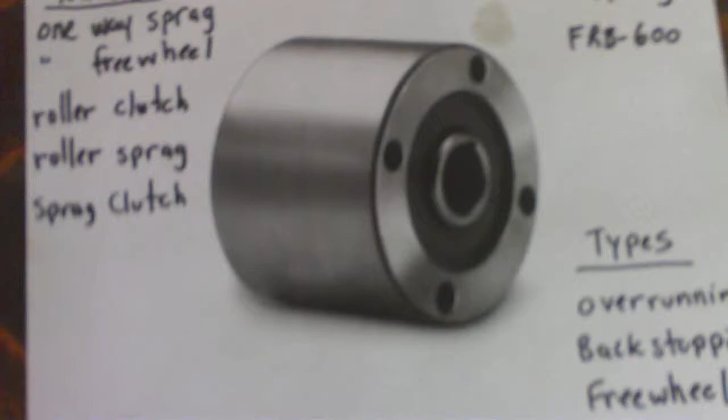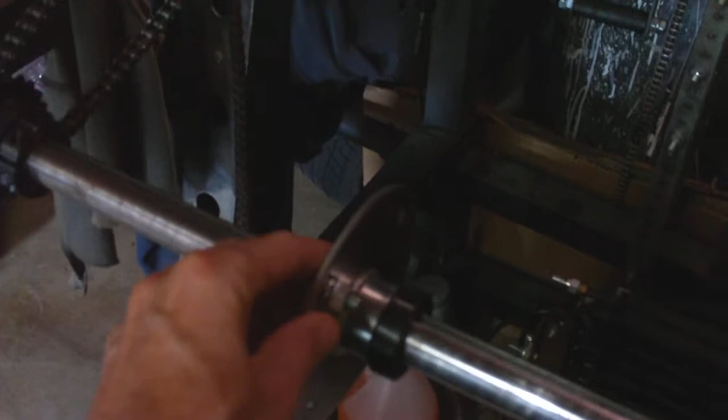So in the last video I did, I talked about the sprag clutch and investigating that as a possible solution for disengaging the winding wheel from the transfer shaft.

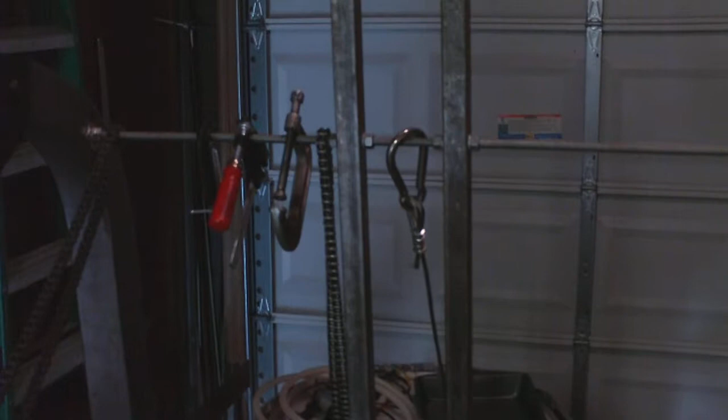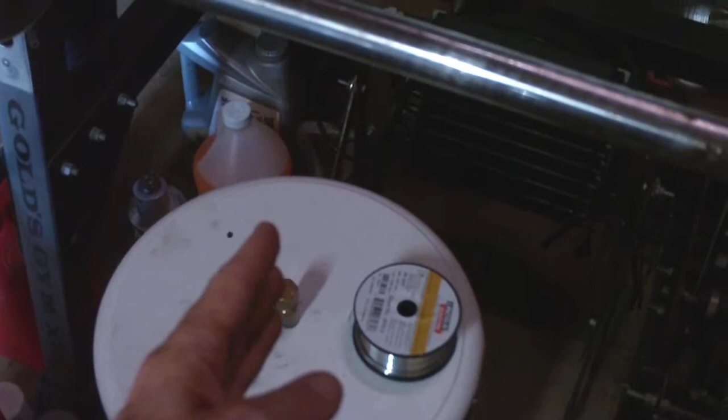Just to go over something real quick from the last video: after the weight falls on this gravity driven generator, the shaft is no longer rotating and transferring the motion to the gearbox and to the PMA back there to generate electricity. After the whole process is stopped and the weight has fallen, the weight has to be wound back up, which I mentioned already is going to be done manually through a boat winch, which is right there.

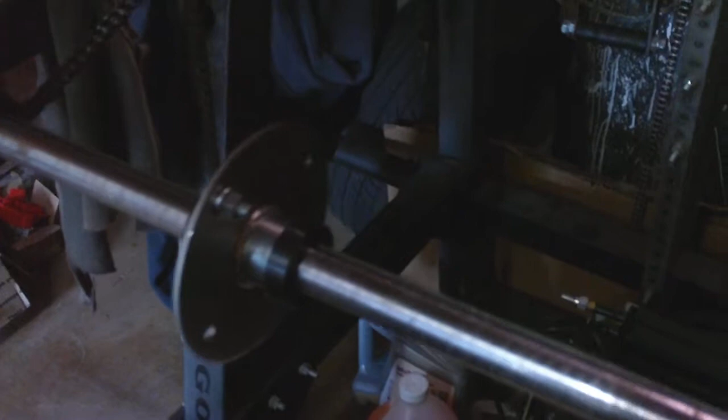Now, the problem is when you wind the weight back up, when a chain is attached to the sprocket -- which isn't mounted on here right now, but when a sprocket's mounted on here -- we would be competing with the force of the gearbox, a high ratio gearbox. That's not going to work. It's going to be very difficult to bring the weight back up. So there has to be a way to disengage the transfer shaft when we're winding the weight back up.

So that gets us back to where I was last time in the video, where we talked about using one of these, called a sprag clutch, specifically a backstopping sprag clutch, so that we could facilitate disengaging the weight from the winding of the weight back up from the transfer shaft.

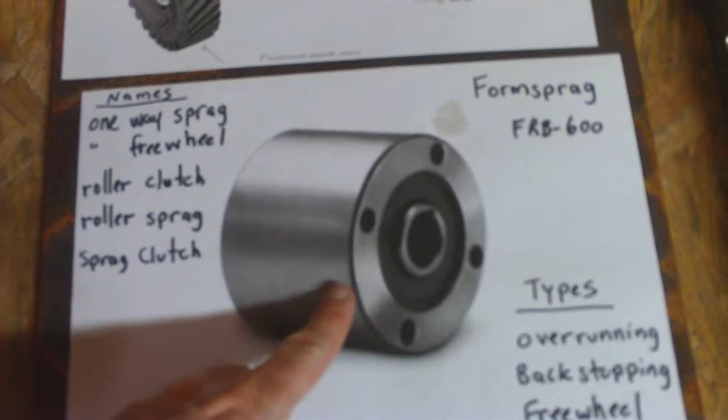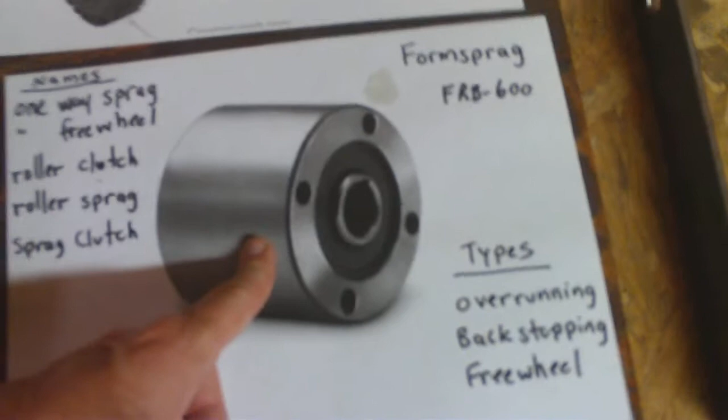So I looked into these and been poking around on eBay and some other sites, and for the amount of torque that I need for this application, these are very expensive, even the ones sitting in old stock. I'll keep looking around, but they're very expensive. These things run well over $1,000, some of them even more than that. I've seen some of these run up into over $10,000. For the one I need, at least brand new, it's well over $1,000. I just can't justify spending that kind of money.

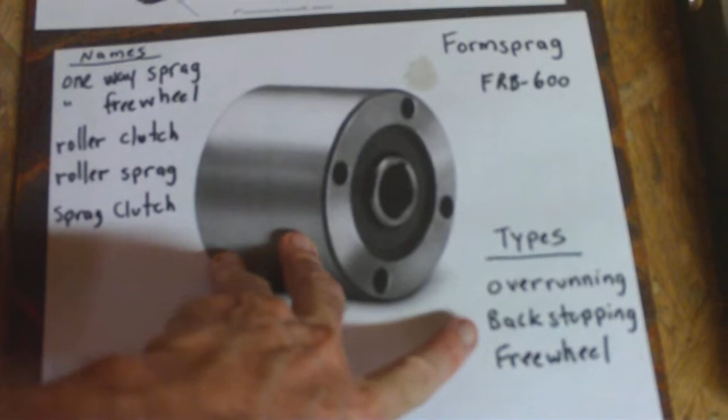I'll keep looking into some sprag clutches, backstopping clutches, to see. It's actually a freewheel backstop combination kind of clutch, but I'll keep looking to see if I find something.

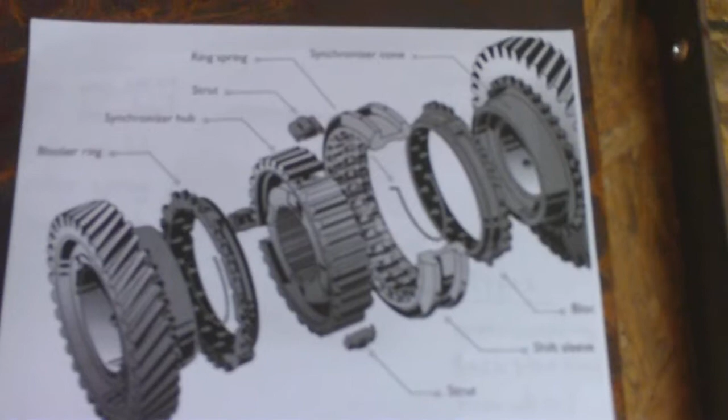But anyway, I've been throwing around some other idea, and some of you are going to recognize this, especially you automotive guys. This is a typical assembly for a manual transmission. Now, this particular picture only shows the meshing of two gears. The one on the far right is a gear, and the one on the far left is a gear. Everything in between is part of a synchronizing process, or synchronizing components, that help mesh these two gears together.

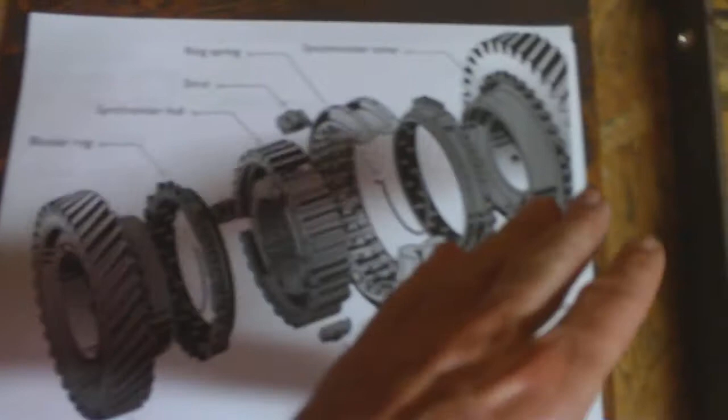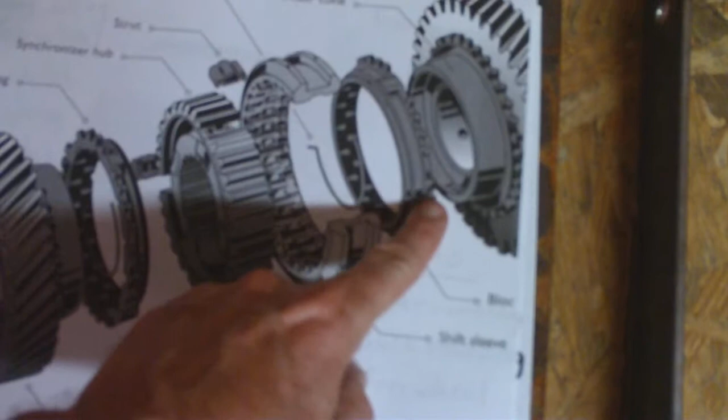So I've been looking into the idea of tinkering around with this. Just to quickly go through some of the components: this is a gear -- let me get my glasses on, can't see what I'm doing here. This is what's called a blocker ring. This is what's known as a synchronizing hub, or synchronizer hub. This piece in the middle is known as a shift sleeve, or sleeve -- I just call it a sleeve. And then to the right we're just repeating the process: this is once again a blocker ring, and this right here is known as a synchronizing cone, and then another gear. So way back over here, this little component is also a synchronizing cone.

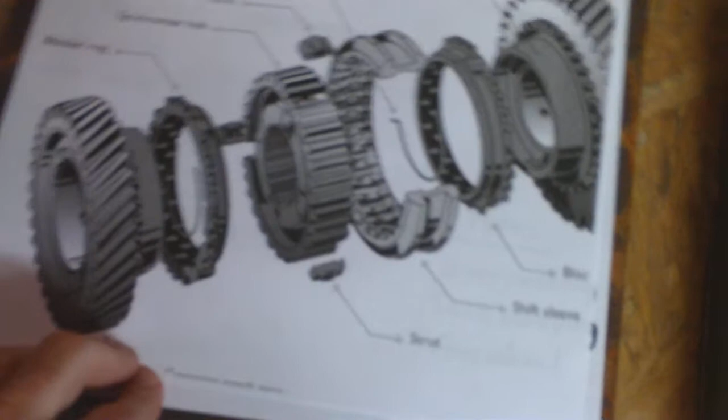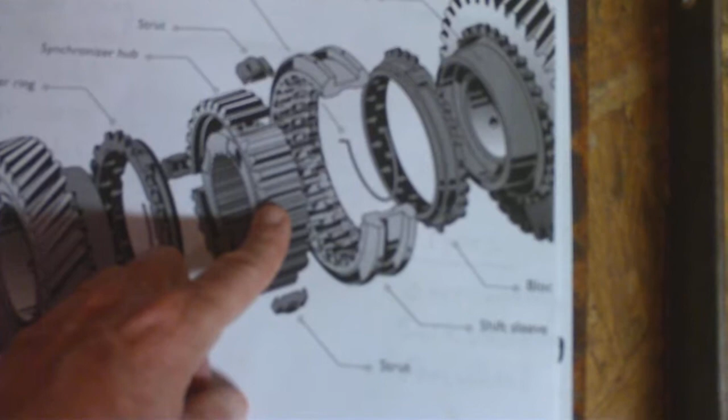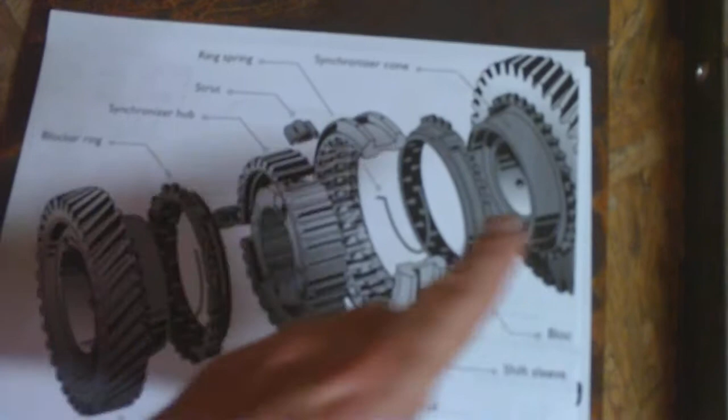Now, I've taken a close look at this assembly, watched some YouTube videos, watched how it's actuated, and I'm pretty certain that for this application all I'm going to need is the sleeve. What I'm going to do is take a synchronizing hub, or at least something similar, and attach it straight to the sprocket face instead of a gear. So I won't be using this synchronizing cone, which has teeth of its own -- I don't need that. And the reason I don't need that is because I'm not going to be synchronizing two sprockets while they're both moving. That's called unsynchronized meshing.

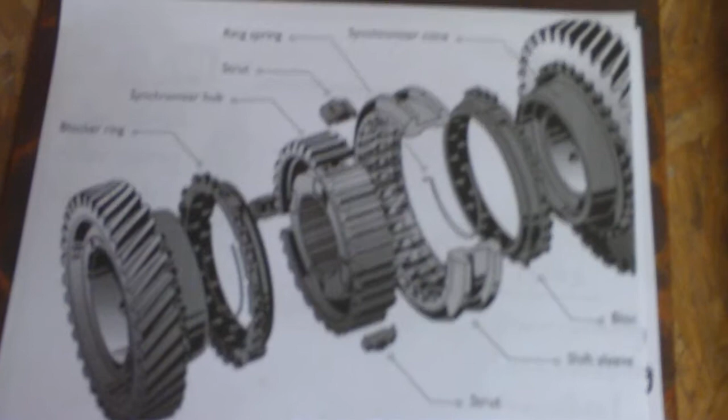And that's common when you're trying to get your car into first gear or put your car in reverse on a manual transmission -- those are what we call non-synchronized or unsynchronized gear meshing. For any of you that drive manual transmission, I'm sure you've heard it a million times: you're trying to get the car in first gear and you're fighting the gearbox, and sometimes it makes a little grinding noise. Same thing in reverse, you kind of feel a little clunky engagement.

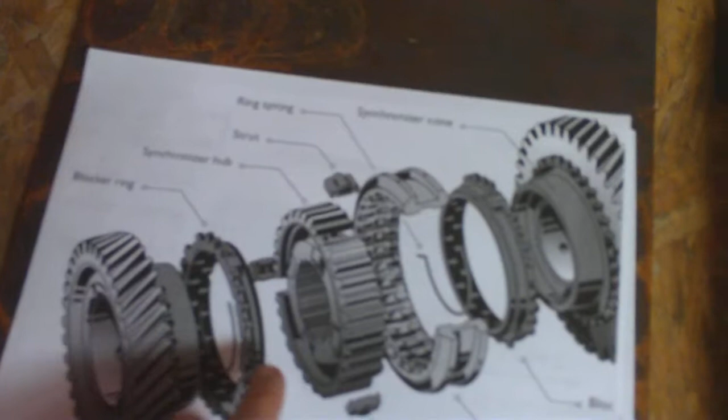That's because they're not synchronized, okay? And that's only possible when both sprockets on each end are not moving. So I'm not going to need a synchronizing cone, I'm not going to need a blocker ring, but I am going to need some form of synchronizer hub, which there's going to be two of these.

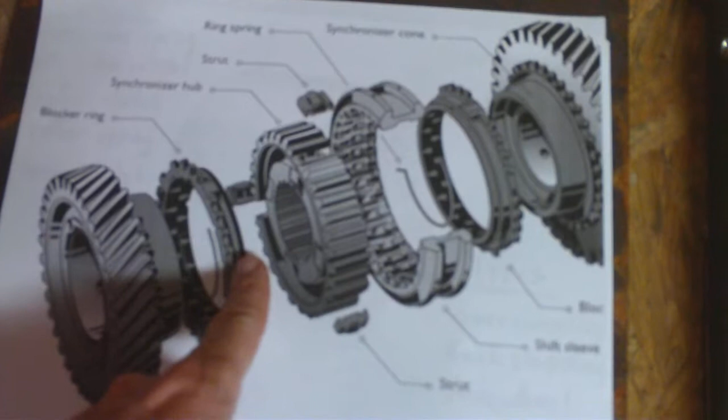I'm going to attach them straight to the sprocket on the end. So this will attach straight to this without this piece in the middle and without the cone. And I'll do the same thing on the other side. And then I'll have a nice big fat wide sleeve.

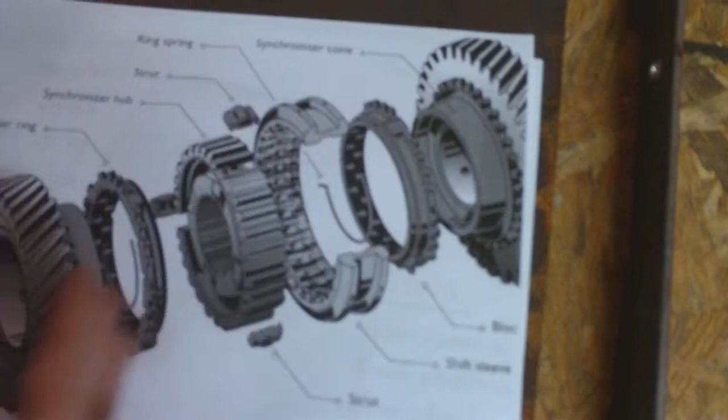So the way this works is when the sleeve is all the way over to one gear, or in my case all the way over to one sprocket, the two sprockets or the two gears will not be synchronized, meaning they will not spin together. The one will just be sitting idle while the other one turns.

When I want to synchronize them, I'm simply going to take the sleeve and move it halfway off of the hub.

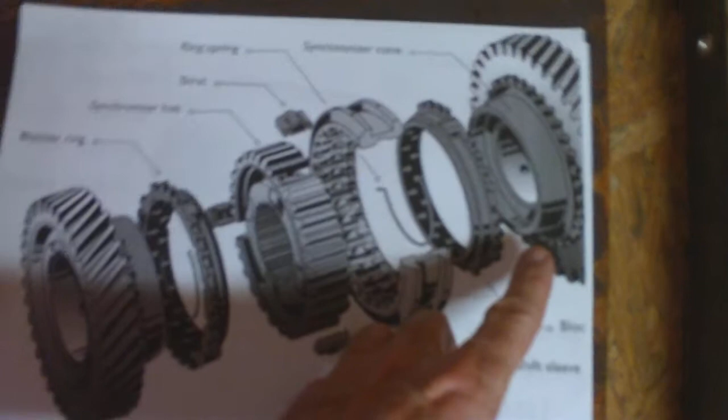The hound dog next door is going crazy because the ambulance's siren's going off. Yeah, I love these hound dogs. Hilarious. So, yeah, hound dogs and ambulances, they just don't go together. Pretty funny, right? A little Texas humor here.

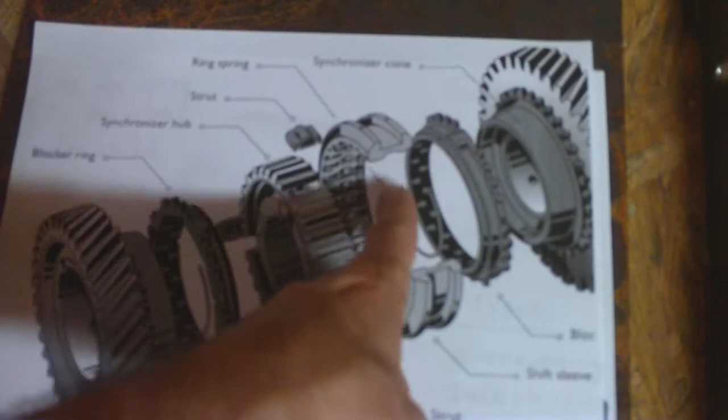So the sleeve, when it's halfway off of the synchronizing hub, will actually be synchronizing the two gears, the two sprockets together, okay? I won't get into all the details, but you can Google that, check it out yourself to see how a manual transmission works with the sleeve and the synchronizing hub.

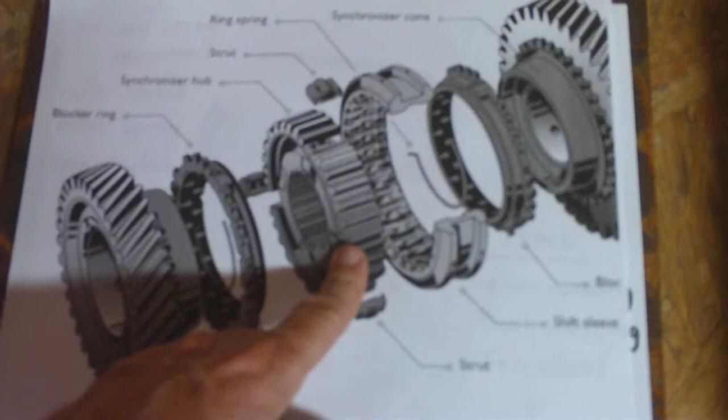But I'm pretty sure that I could probably fabricate some of this, or something sufficient enough. I'm going to see if I can do it. I'm not sure I can do it, but I'm going to try. And if I can, that's going to make this a heck of a lot cheaper, because I could probably do it for a couple hundred dollars or less.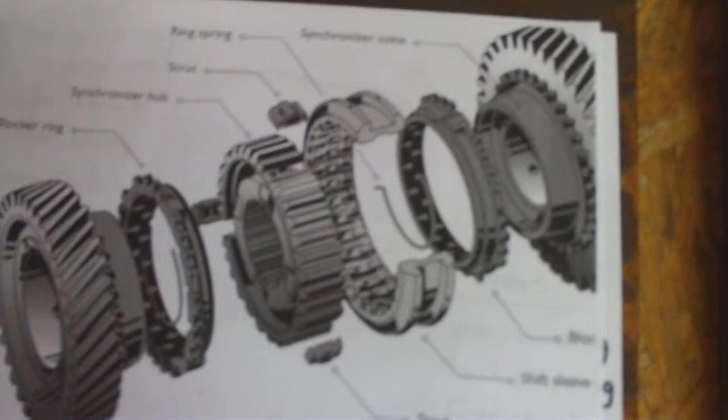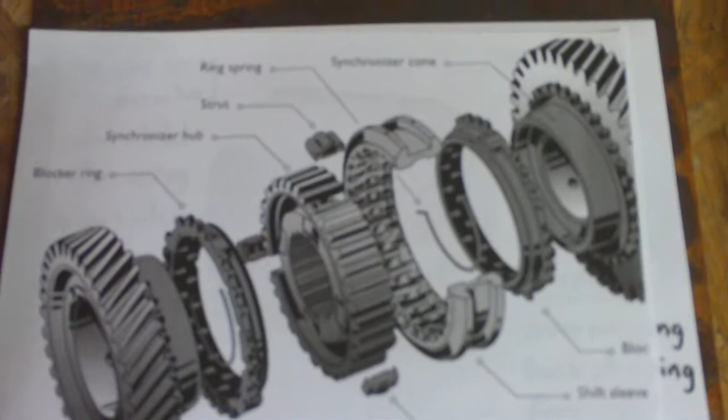And I might even look into buying these components from an existing transmission, maybe some type of package, if I can find it cheap enough, and if I think it can handle the torque load, which it probably could, but I'll have to do some research. So that's where I think I'm headed, because two of these, in a sleeve mounted to sprockets on each end, is going to be a heck of a lot cheaper than one of those.

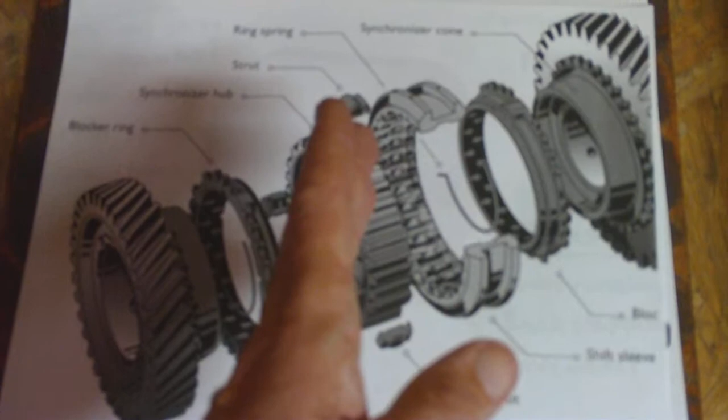So when the weight is all the way down on this gravity-driven generator, all the way down on the ground, and nothing's moving through the whole entire generator, this sleeve will be able to slide on and off manually. So that's what I'll be doing. I'll manually be sliding it to engage it and manually sliding it back to disengage it.

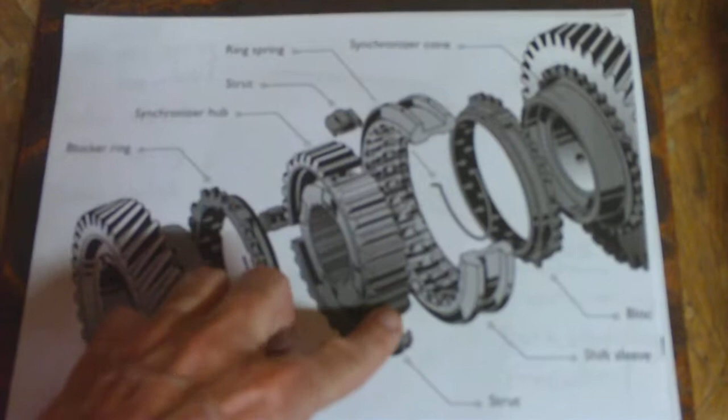And yeah, I may have to wind up the weight a little bit with the boat winch just a little bit to get this synchronized, but I'm going to make sure the synchronizers are far enough apart, meaning the teeth on the synchronizing hub won't be as many as you see here. I'm going to have fewer, maybe 8, maybe 10 or 12 total all the way around. So there'll be larger gaps between these teeth, and that'll be easy to synchronize them when the weight is all the way to the ground.

But I don't foresee that being a problem. If I have to move the weight a little bit with the boat winch, wind it up an inch or two to get this to synchronize, it shouldn't be a problem.

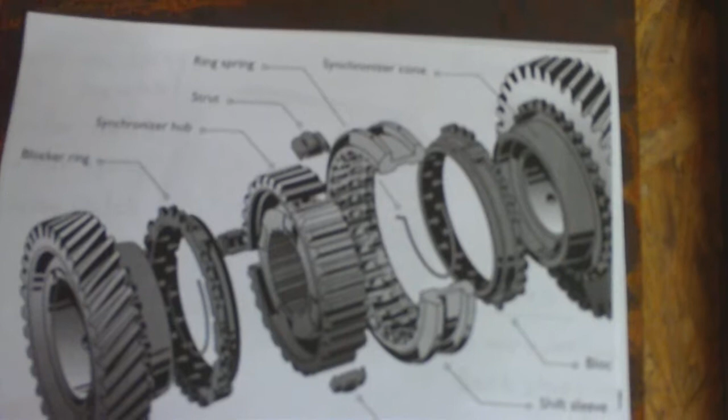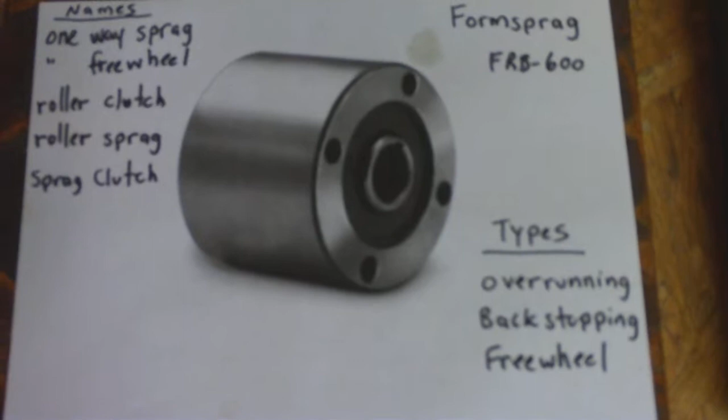So I just want to tune you guys into what I'm doing because I said before in the previous videos that I want to keep you guys informed about where I'm headed, and I think this is something I'm going to delve into a little bit and see if it's possible for me to do this and keep the budget within reason, because I would love to have one of these. This would be great, really nice, the way to go, just not affordable.

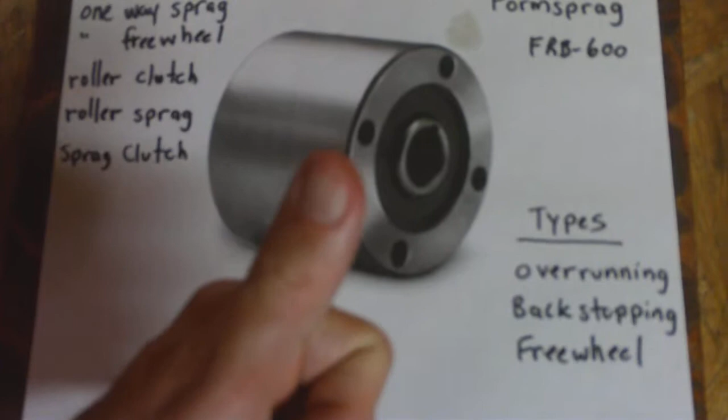I'm looking forward to continue with this project. I'm starting to get back into this, and once I get done with my research part, it's going to be back to either making components and integrating components and getting this puppy up and running. Alright guys, thanks a lot. Thanks for watching. Talk to you soon.